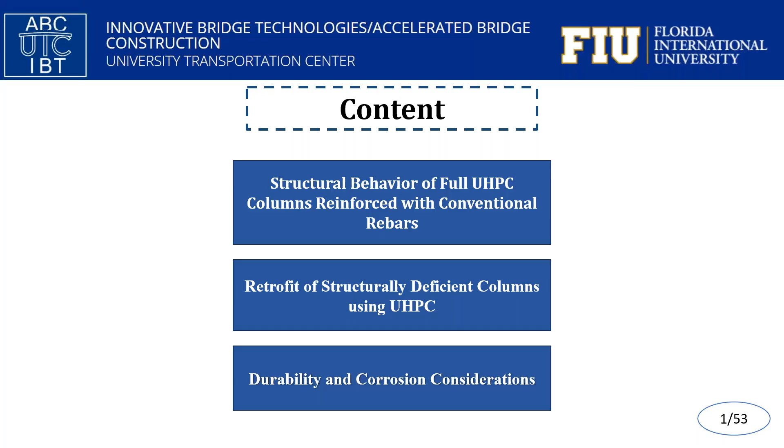The second project investigates the use of UHPC as a retrofit material for deficient concrete columns, and the third project explored the durability performance of UHPC.

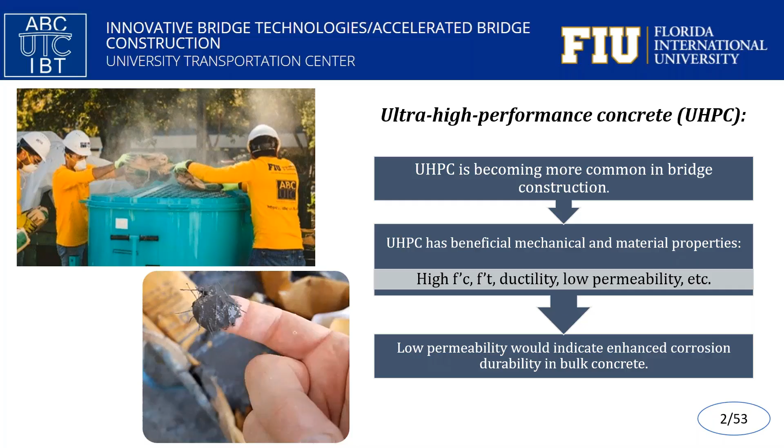Ultra-high performance concrete is an innovative cement-based composite material with exceptional properties including ultra-high compressive strength, high durability, and capability for micro crack self-healing, which can significantly prolong service life. Not just in the case of extreme loading - with time, due to environmental factors, materials deteriorate, and so do structures.

Both seismic and non-seismic structures subjected to deterioration were found to have less collapse resistance. This can be associated with material deterioration, which results in decreasing ductility and strength. Columns are the main elements for the stability of structures, and several approaches have been proposed in literature to improve the performance of columns under axial and lateral load.

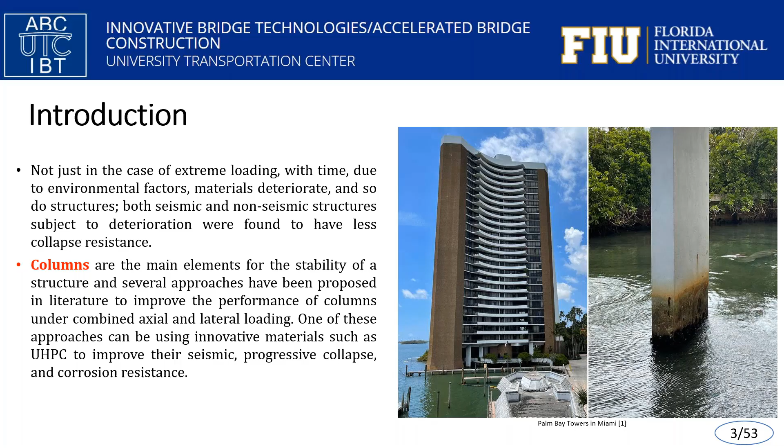One of these approaches can be using innovative materials such as UHPC to improve their seismic, progressive collapse, and corrosion resistance. Overall, very limited research work was performed to investigate the performance of full UHPC columns under axial and lateral loading. So FIU research work aims to investigate the structural behavior of UHPC columns reinforced with conventional rebars.

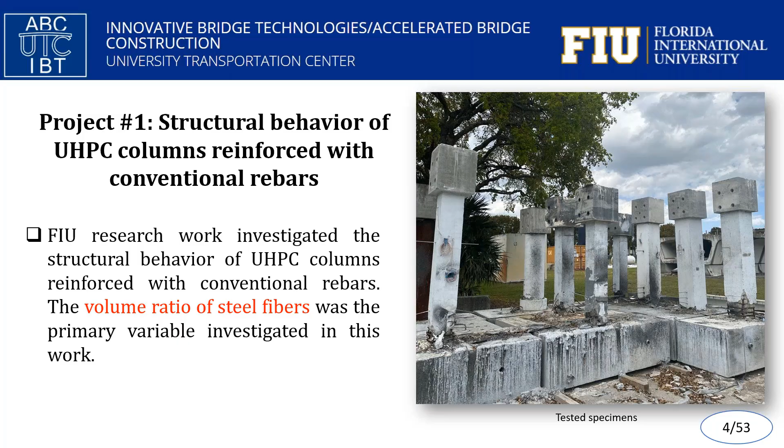The volume ratio of steel fiber is the primary variable investigated in this research work. All column specimens have 60 inches high and reinforced with conventional rebars. For longitudinal reinforcement, we used 8 rebars, and you can see the cross-section of all UHPC columns in this figure. All specimens had same geometry and reinforcement details.

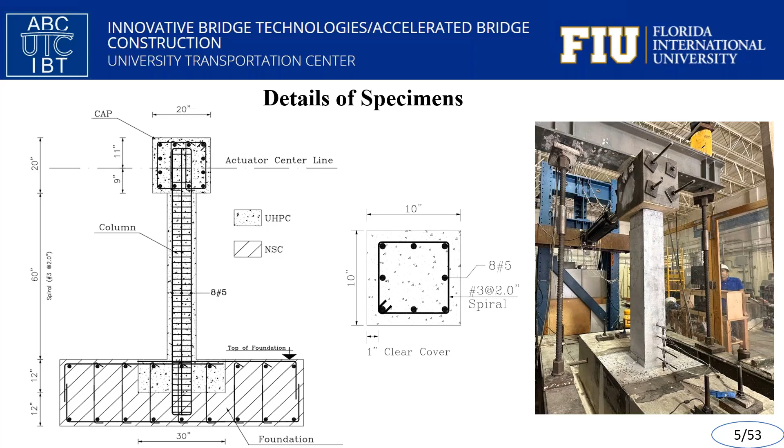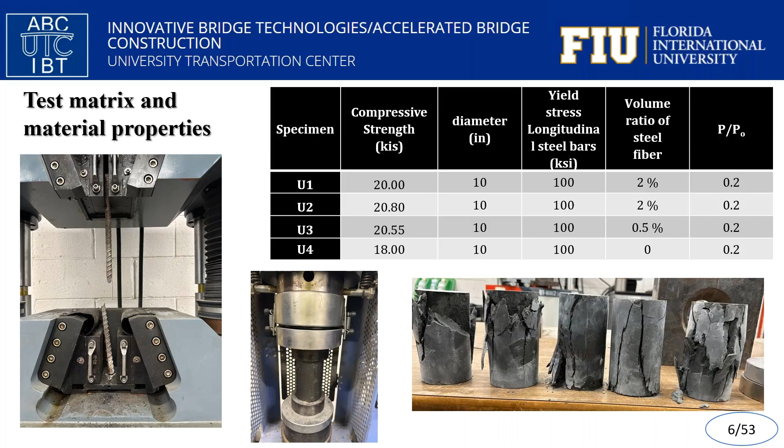To have the material properties, we tested UHPC sample and rebars in our material lab. And these figures show construction process.

First, the reinforcement cage of the foundation were placed inside the footing formwork, and all longitudinal rebars of the column were positioned inside the footing. The outer part of the foundation was then cast with normal strength concrete. It should be noted that UHPC footings were considered for all specimens to better understand the behavior of the plastic hinge.

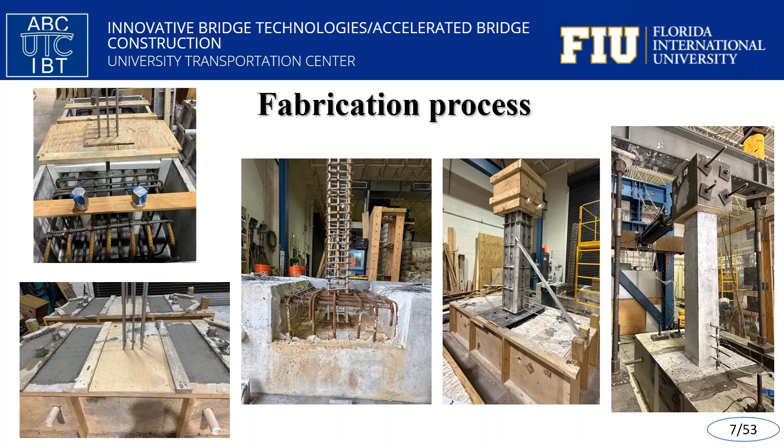Only the representative part of the foundation below the column was cast with UHPC, and normal strength concrete was used for the rest of it. Here you can see the test setup which we used to apply axial and cyclic lateral loading. A hydraulic actuator applied the cyclic load.

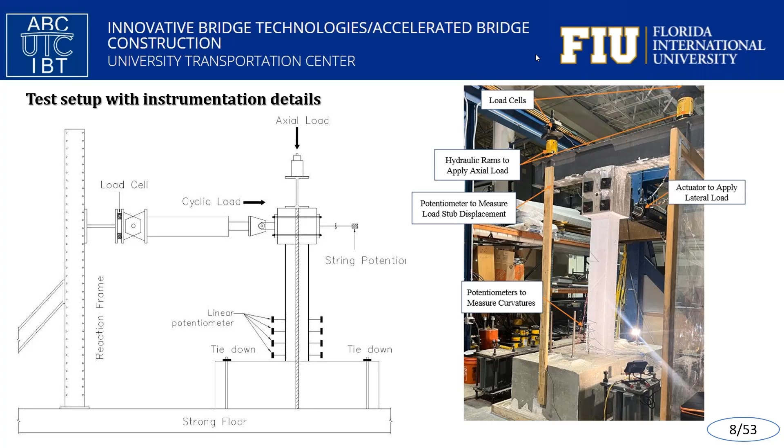The displacement control method, implemented as incremental drift ratio, governs the cyclic loading. Using a beam and hydraulic jack, a pure axial force equal to 20% of the column's capacity was applied to the top of the column.

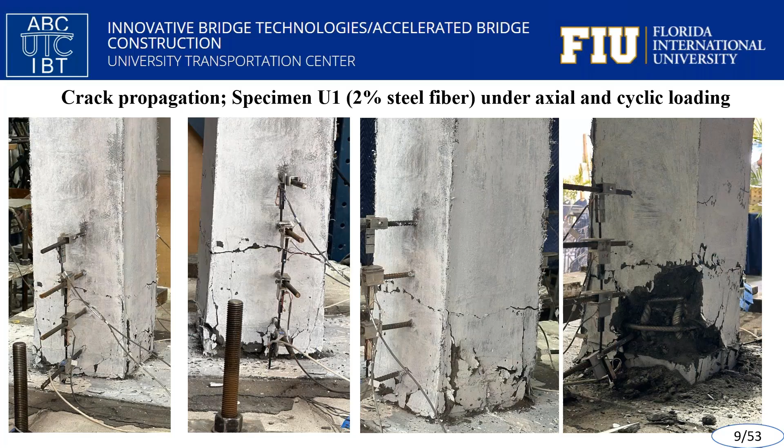Here you can see the crack propagation of our first specimen, which had 2% steel fiber. Flexural cracks appear near the base of the column at early loading stage. Cracks were concentrated at the bottom, aligning with the area of maximum bending moment and shear. As the load increased, flexural and shear cracks extended upward. This figure shows the final stage of loading, which means the column experienced about 7-inch lateral displacement.

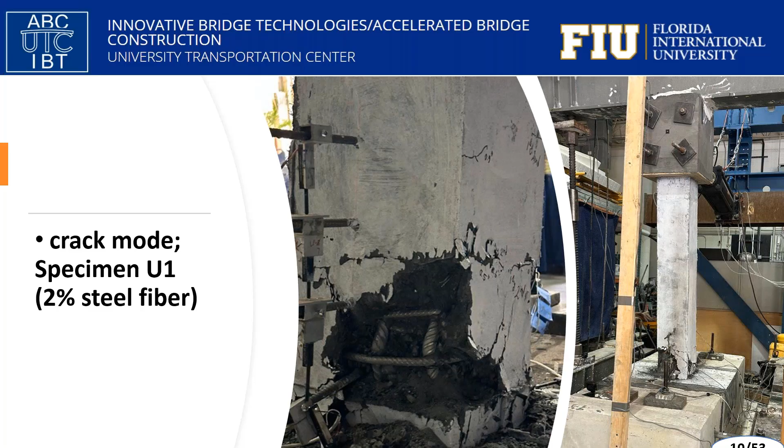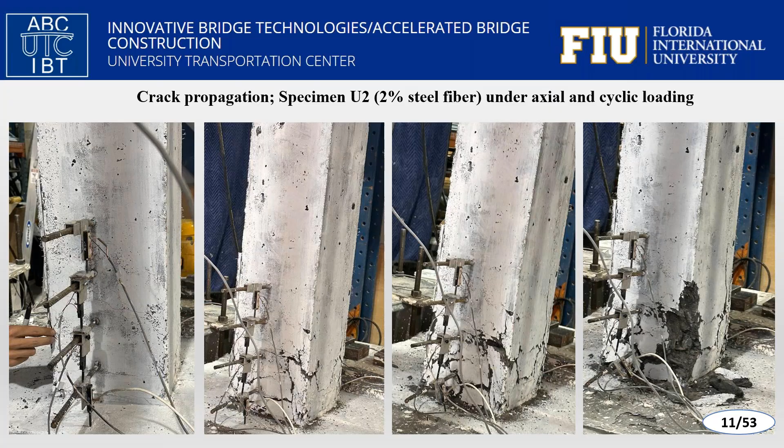We tested another specimen with 2% steel fiber, and the same damage mode was observed. Horizontal and diagonal cracks form under combined bending and shear forces, intersecting with the flexural cracks. The steel fiber delays crack propagation and prevents rapid deterioration.

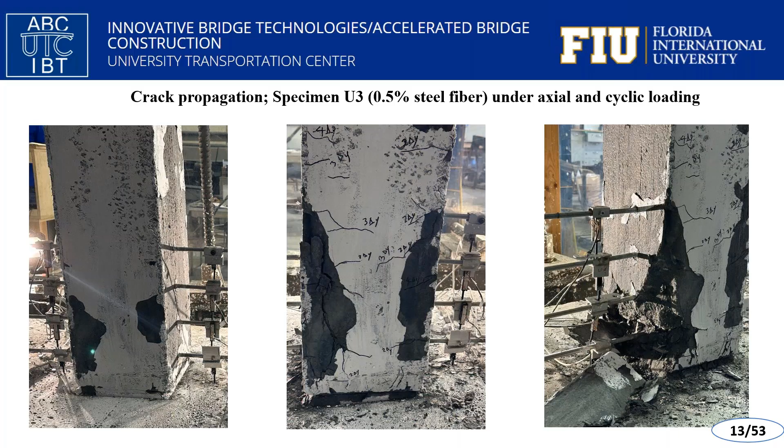Here you can see the crack propagation of the third specimen, which had 0.5% steel fiber. Horizontal and diagonal cracks were more prominent compared to the specimen with 2% steel fiber. Wider cracks and less effective control of crack propagation was observed. Spalling of concrete became evident, especially near the compressive zone. You can see the final deformed shape of the column at 7-inch lateral displacement; localized crushing and widening of cracks occurred.

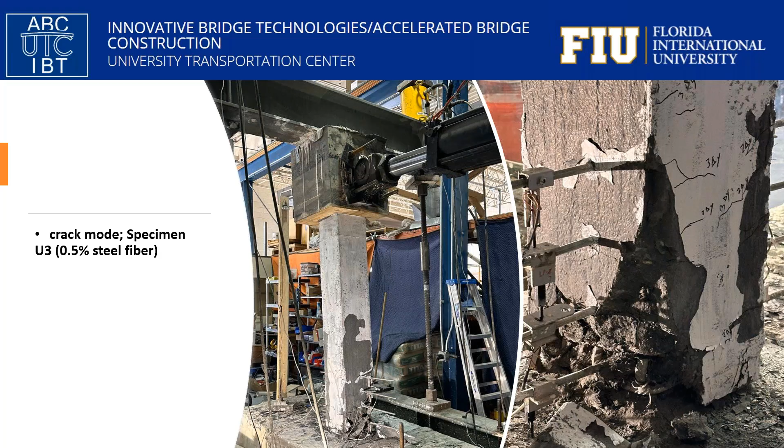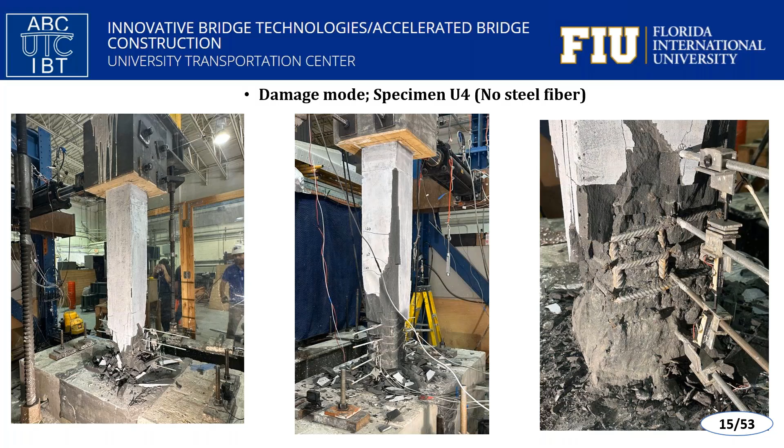Here you can see the crack modes for a specimen without steel fiber. Cracks propagated rapidly, with horizontal and diagonal cracks forming early and widening significantly. Severe spalling and extensive crushing of concrete occurred, leading to rapid loss of load-bearing capacity. We had to stop the test at 5-inch lateral displacement. Cover crushing occurred at an early stage of loading. The absence of steel fiber results in poor energy dissipation and brittle behavior.

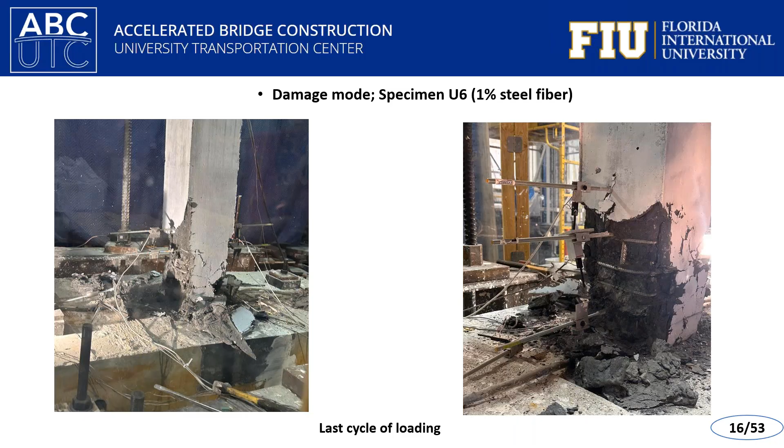The hysteretic response of specimens demonstrates the impact of steel fiber content on ductility, energy dissipation, and overall structural performance. The specimen with 2% steel fiber exhibits stable hysteretic loops. The steel fiber contributed significantly to crack control, delaying stiffness degradation and enhancing load carrying capacity.

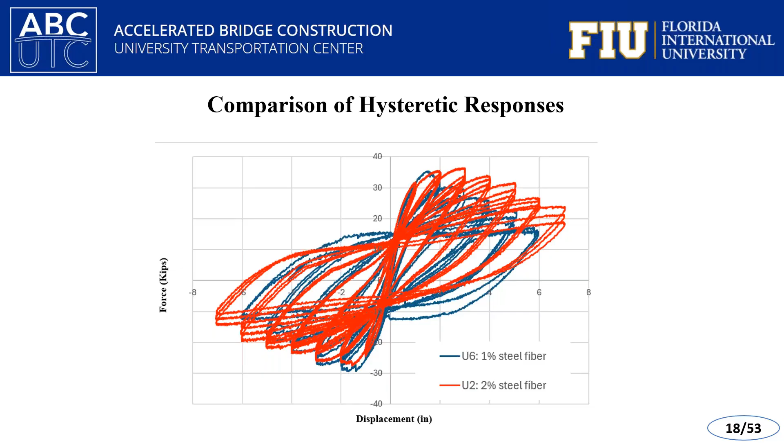The specimen without steel fiber showed poor energy dissipation capacity and rapid stiffness degradation. The absence of steel fiber results in brittle behavior with significant strength degradation. This figure shows the hysteretic response of UHPC columns with 1% and 2% steel fiber content. The 1% fiber specimen still shows improved performance compared to the fiberless UHPC column.

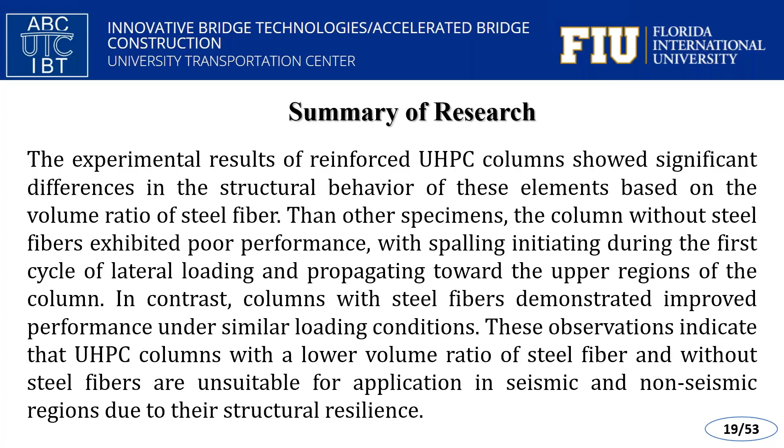The experimental results of reinforced UHPC columns showed significant differences in structural behavior based on the volume ratio of steel fiber compared to other specimens. The column without steel fiber exhibited poor performance, with spalling initiation during the first cycle of lateral loading and propagating toward the upper region of the column. In contrast, columns with steel fiber demonstrated improved performance under similar loading conditions. These observations indicate that UHPC columns with a lower volume ratio of steel fiber, or without steel fiber, are unsuitable for application in seismic and non-seismic regions due to their lack of structural resilience.

UHPC is characterized by its exceptional mechanical properties, including high compressive strength and low permeability. However, its brittleness remains a significant concern, especially under cyclic and axial loading. Steel fibers are commonly incorporated into UHPC to mitigate this brittleness and enhance structural performance.

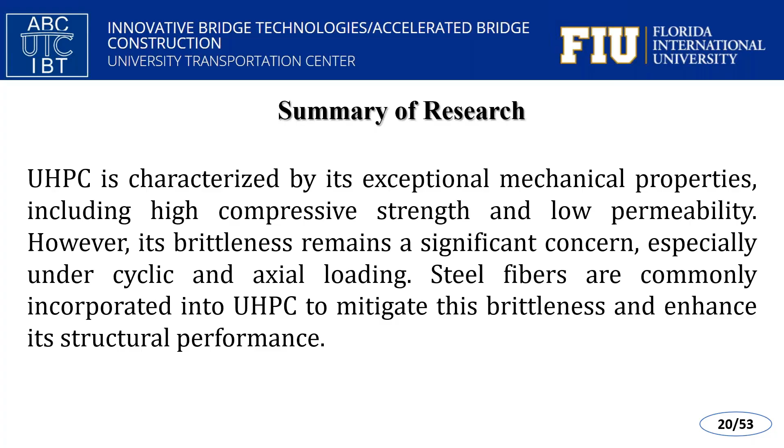Now, let's move on to a very common and critical scenario where the structure already exists, but due to long-term environmental exposure, such as corrosion or extreme loading events, certain critical elements like columns need strengthening. This is not a rare situation; in fact, it's something engineers often face in real-world practice. That's why regular inspection of existing structures is essential, based on the condition and level of deterioration. Choosing an appropriate and optimized retrofit method is crucial. Neglecting this need for inspection and retrofit can have serious consequences.

As we tragically saw in the collapse of Champlain Tower in Miami. In this context, our second project investigates how using UHPC jacket can offer an effective solution for retrofitting deficient columns.

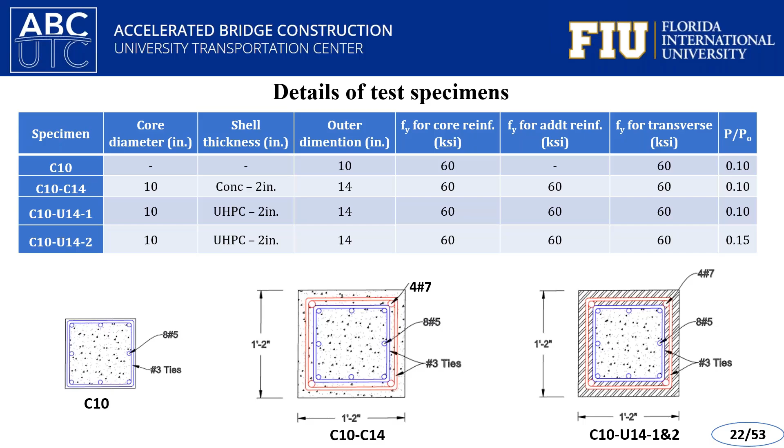The experimental program involved 4 large-scale column specimens. One served as the control column, the other 3 were retrofitted columns: one using normal strength jacket (C10-C14), and 2 using UHPC jacket (C10-U14-1 and 2). For all retrofitted columns, the jacket was 2 inches thick. One of the UHPC jacket columns was tested under higher axial load to assess the influence of axial force on performance.

The fabrication process was completed in several steps. First, the reinforcement cage for the footing was placed inside the footing formwork, and then all the longitudinal rebars of the column, including those for the core and jacket, were positioned inside the footing. The footing was then cast with normal strength concrete.

Next, the stirrups of the core were placed and the cores were cast. For the retrofit specimens, the surface of the core was roughened by sandblasting to improve bonding with the jacket. The jackets were then cast, one with normal strength concrete and 2 with open source UHPC mix.

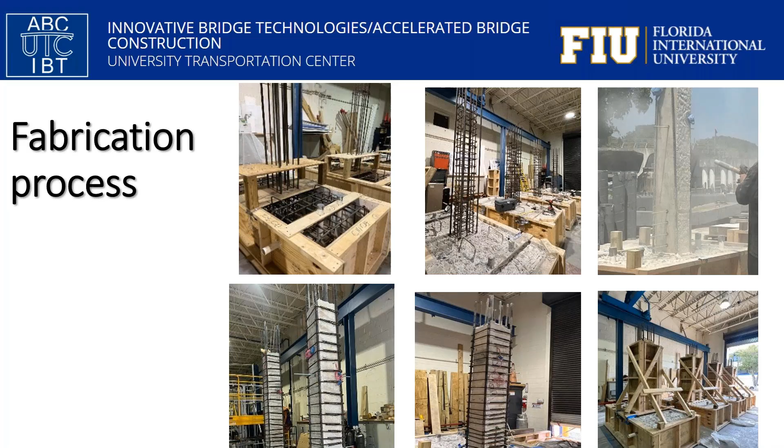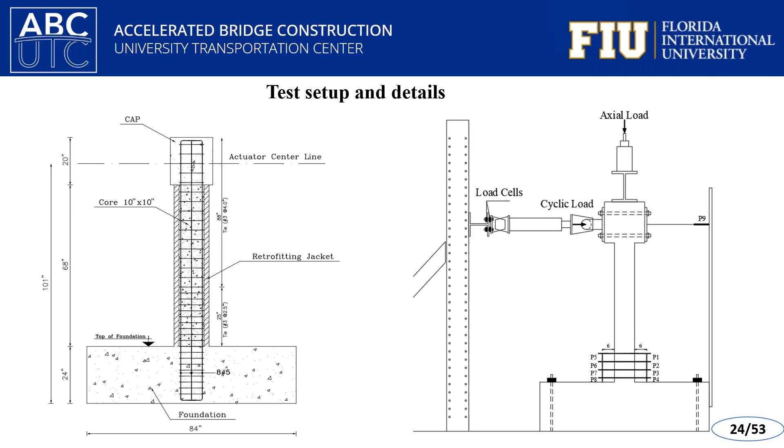This figure shows the test setup for the experimental program, which is the same as the previous project. Each column was first subjected to a constant axial load, then cyclic lateral displacement was applied using an actuator. Linear potentiometers were used to measure lateral displacement and curvatures along the plastic hinge region, and strain gauges were attached to reinforcement rebars to capture local behavior.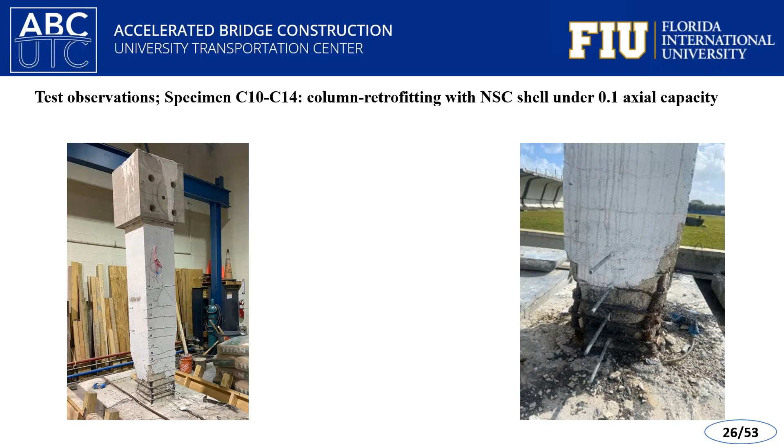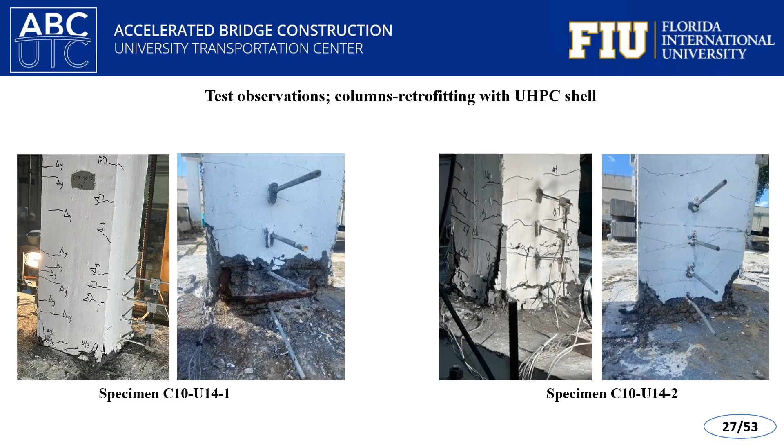This figure shows the failure mode of both retrofitted specimens using UHPC jacket. As can be seen, flexural cracks in both specimens developed within the height, but compared to the previous specimen, plasticity occurred over a shorter length. This demonstrates actually a higher stress concentration in specimen C10-U14-1, similar to the specimen with normal strength jacket. Failure occurred when the crushing of the concrete penetrated through the jacket, causing the longitudinal rebar to lose the UHPC's lateral strength and subsequently buckle.

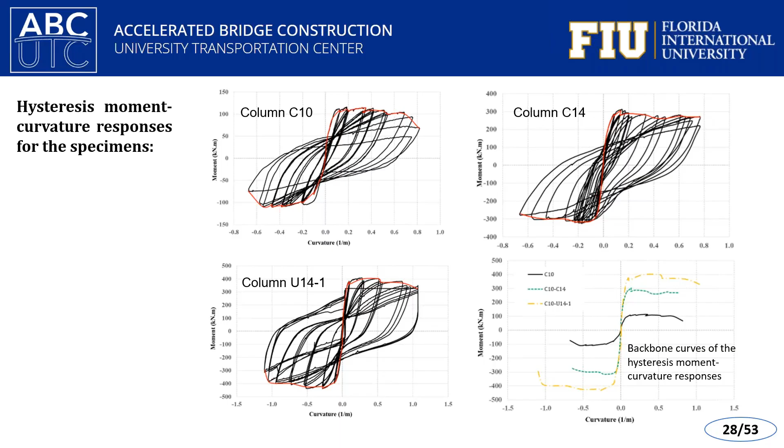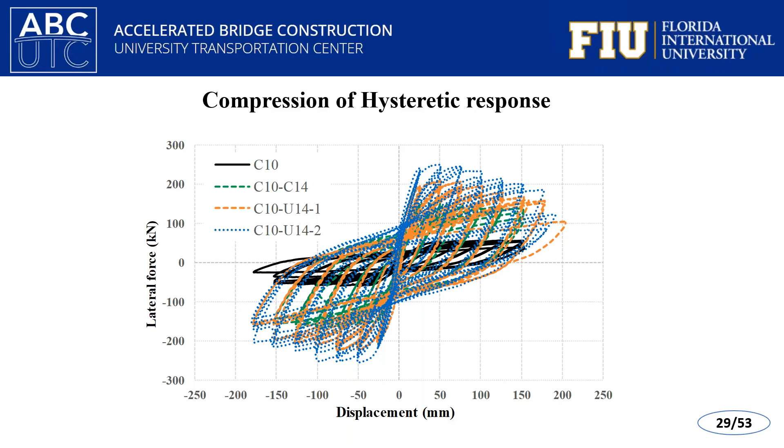The hysteresis curve for all specimens shows ductile flexural responses. In conclusion, the experimental data indicate that a reinforced UHPC shell served as an effective retrofit technique.

The reinforced UHPC shell notably enhanced the structural performance of the retrofit specimen by increasing flexural capacity, stiffness, and energy absorption during cyclic loading, while preserving ductility compared to normal strength concrete jacket.

The reinforced normal strength concrete jacket didn't significantly decrease the plastic hinge length. Conversely, the reinforced UHPC jacket significantly reduced the plastic hinge length, focusing plasticity within a shorter region. Despite this reduction in plastic hinge length, the plastic rotation capacity increased, enabling the UHPC jacketed members to maintain ductility effectively.

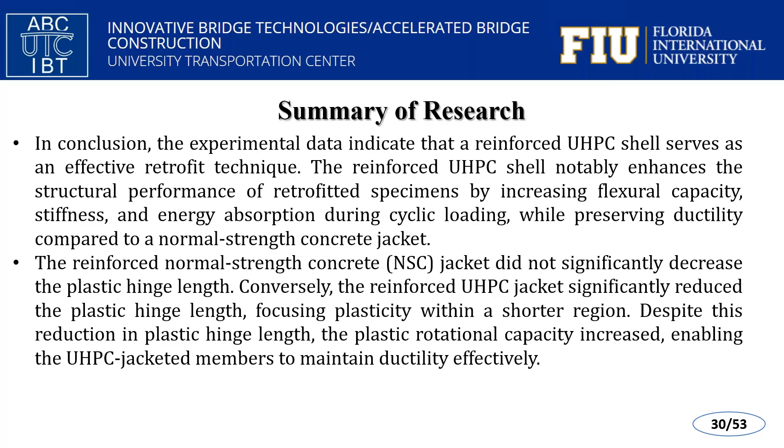Thank you, Fatima. So you gave us a couple of case studies of interesting and novel uses for UHPC for bridge applications. It seems like UHPC is becoming more and more important as a tool and a material for our construction. So we'll talk a little more about some of the durability implications for UHPC and some corrosion considerations, and how they may be implemented not only for new construction but also for some of the retrofit cases that you described in the second case.

Ideally, steel placed in concrete environments should be a very ideal situation. Steel in the high pH environment of the concrete pore water typically develops a passive film, so corrosion really should not occur at all. But it's in extreme and aggressive environments where that passive film can be broken down. In most of the cases we see, especially from marine bridges and marine columns, it has to do with the presence of salts.

Notably, chloride ions are notorious for being able to break down that passive film. When you have these aggressive salt environments, whether it be from the seawater itself or just atmospheric spray near the coastlines, chlorides are able to penetrate through the concrete cover, through the concrete pore water, eventually diffusing with enough concentration at the steel interface to start breaking down that passive film.

This cartoon on the right-hand side is drawn by Marcel Pourbaix. It's a famous cartoon showing some of the thermodynamics associated with how corrosion can develop for steel in various environments, including high pH concrete pore water environments. Typically in high pH environments, the corrosion, or the devil, is locked up in a cage, and we call that passivation. So we can manage the rate of corrosion that can occur and limit that rate to where it can extend to the service life that we expect for our bridges.

In certain environments the devil can break free, where corrosion can occur, and the effect of aggressive environments like chlorides really is able to break that devil free from that cage essentially. We'll talk about some of the material ramifications for chloride penetration, but we'll also spend some time focusing on an area in terms of carbonation-induced corrosion. This has implications for marine bridges, for bridges that have long service lives, and it has implications as well for buildings, especially for older structures or concrete with lower quality concrete. We'll talk about how UHPC can be used to mitigate some of these effects.

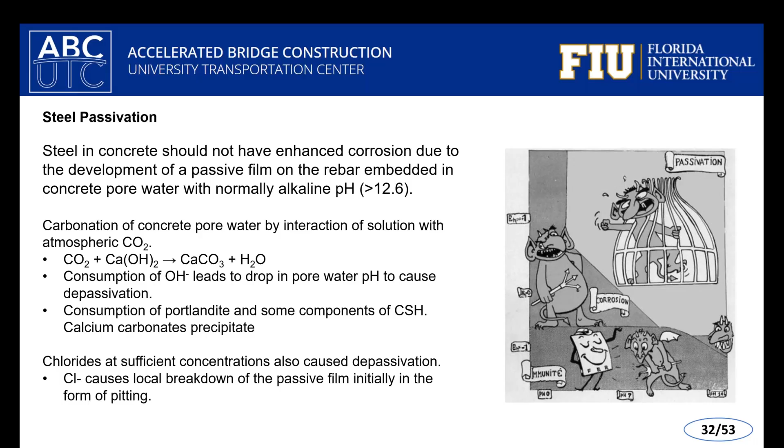Importantly, the consumption of the hydroxyl ions causes the reduction of pH. Going back to Marcel Pourbaix's cartoon on the right-hand side, it gets to a point where the devil becomes more prominent as we shift from the higher pHs to lower pHs as the hydroxyl ions are consumed. We'll talk about some of the effects, and how UHPC can be useful to mitigate some of these effects.

So what are the major factors that account for carbonation-induced corrosion? Well, evidently it's material related, and in part also design. The cement content you have, the concrete mix design, including UHPC, and the concrete composition are related in terms of how permeable the concrete may be to not only moisture, but also gases, including carbon dioxide and oxygen.

Evidently design is important, the cover depth. The larger the cover depth, the longer path it takes for moisture to penetrate, or for gases including CO2 to penetrate through the system. So larger cover depth can buy you a little more time.

Relative humidity of the environment is also very important because it's associated with how much water and moisture can be present within the pore system of the concrete itself. At higher humidities, you can develop more moisture within the system, and corrosion is an electrochemical process that requires an electrolyte, requires water. So at higher moisture presence, you can promote these electrochemical reactions, the oxidation-reduction reactions that cause damage to the construction materials.

Wet and dry cycling in terms of moisture is also very important and is somewhat related to oxygen availability. Typically for infrastructure systems, what really causes corrosion in terms of the actual reactions that occur really is oxygen. Oxygen is the universal oxidizer. The reduction of oxygen typically is the reaction that accounts for the oxidation of the steel and the iron. So oxygen needs to be present in the system.

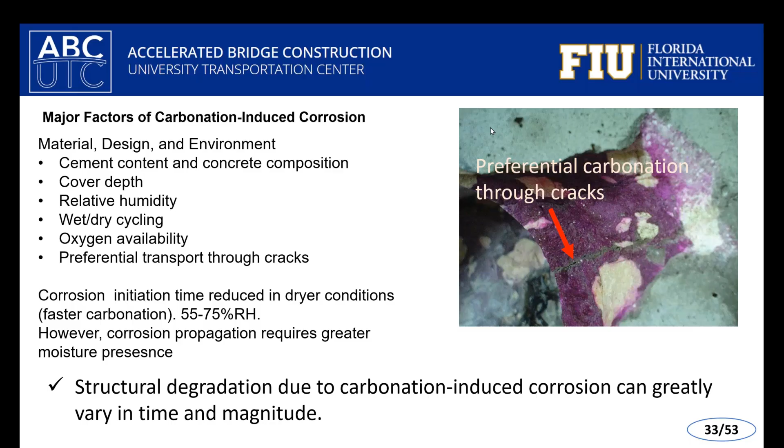Again, we'll allude a little bit to UHPC and how that may be beneficial to mitigate some of these effects. One important thing to mention for this type of corrosion is that the degradation can vary greatly. It's dependent on the material you use, the design detail provisions of the rebar placement, the environment, the cycling of environmental conditions. Many different things affect these things, so often it's very difficult to get a firm grasp on service life.

Piggybacking off some of the work that Fatima mentioned, especially the second project looking at the retrofit system at FIU, we did some experiments with those very specimens to identify the effect of carbonation, how it can occur, and also with the retrofit. We have long-term exposure, the very test columns that are out in our boneyard, where we allow the corrosion to continue, and continuing work looking at the possibly beneficial effect of having that UHPC retrofit in terms of existing corrosion that may occur.

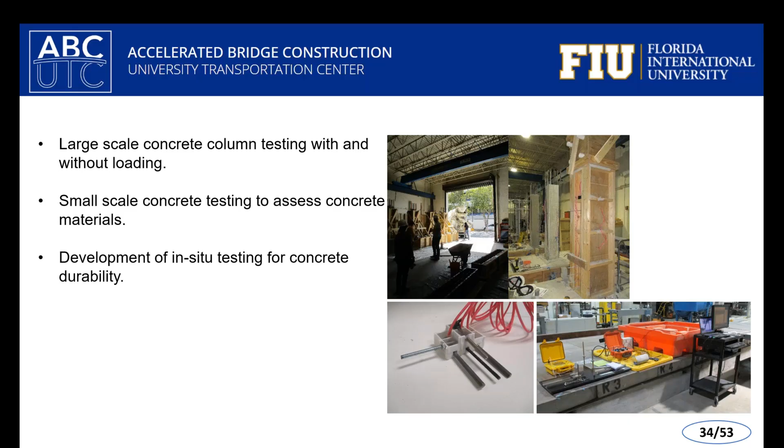So here are a couple pictures of those samples, and I know Fatima presented a little bit on those already. Those are the columns that were cast with the initial normal strength concrete in the interior, a fairly benign concrete. The idea is that this type of concrete probably has more damage than a higher performance concrete, and it may need retrofit. The bottom left-hand corner shows some of the sensors that we fabricated and designed here at FIU and implemented on these test specimens to identify corrosion development, along with some of the material testing that went along with this research program.

So some more pictures of the test specimens during testing. The substrate concrete was a class 2 concrete with a compressive strength about 3.4 KSI. We placed those corrosion probes, two per column - one as a control where it wasn't carbonated, and the other where we developed a method at the university to accelerate that corrosion so we don't have to wait 50 years essentially to get some results.

And so we subjected those columns to accelerated carbonation. We had greater than 99.9% pure CO2. We pressurized a vessel to around 50 psi for one set, and 20 psi, a little bit slower, for another one, to try to force that corrosion and measure its development.

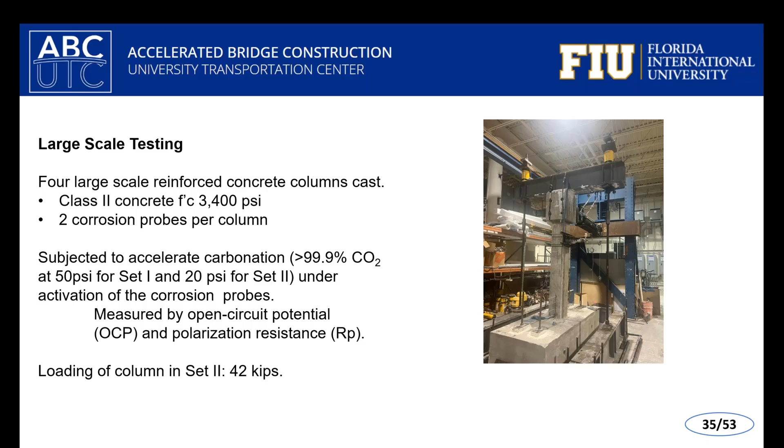The bread and butter for us really is the open circuit potential, the half cell potential some people call it, and also looking at the polarization resistance relating to the corrosion rate.

And knowing the surface area of the steel probes that we have, we can calculate the corrosion current density for each one of our samples. And notably, they're very, very small.

As we indicated, steel loves to be in concrete. It's a very beneficial environment where it should remain durable until bad things happen, including having a long-term presence of carbon dioxide in the system. So the big thing here is we're checking our sanity, identifying the initial cases to confirm they weren't corroding, and then we pressurize the vessel.

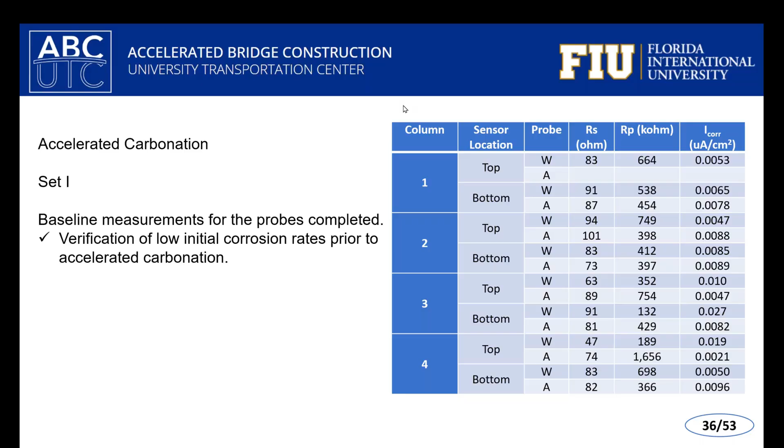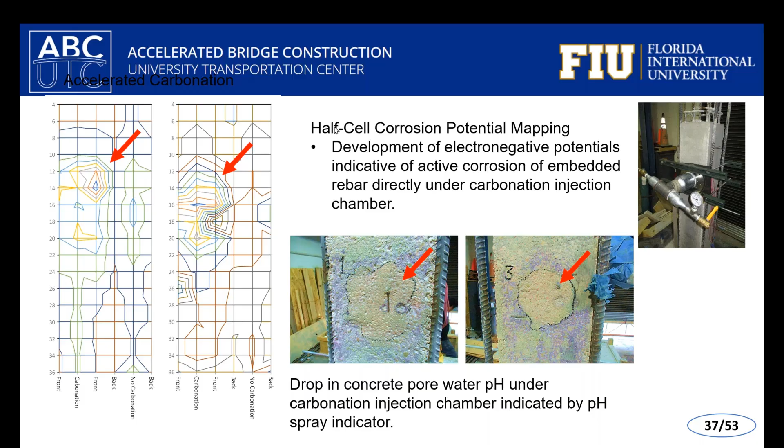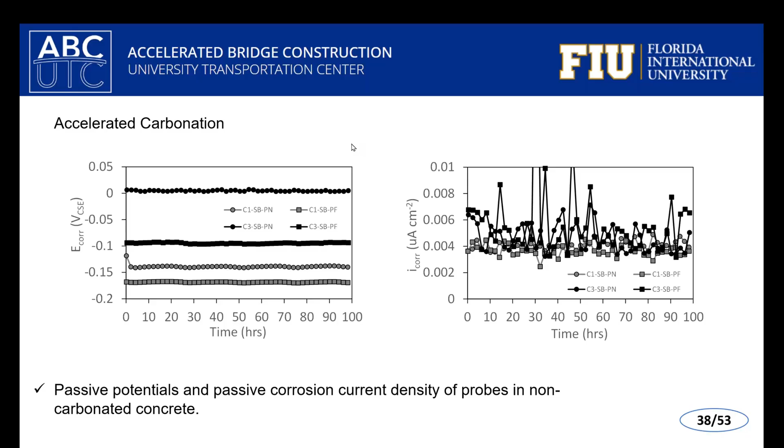It got to a point where it became sufficient to activate the steel directly underneath that pressure vessel. We know active corrosion developed because we have that drop in half cell potentials from more positive to highly negative, more negative than about minus 300 millivolts versus the copper sulfate electrode, along with a rapid increase in corrosion current density. So this is how we verified that corrosion indeed developed underneath that system.

I'll remind the audience that the interior concrete was a low quality concrete. The compressive strength was about 3,400 psi or so. And it seems like some of the residual oxygen that was displaced by the CO2 gas outside was able to move back in or diffuse back into the local area. So for retrofit, this is something we're keeping track of and considering for design purposes, the residual amount of oxygen present in the system, especially when you have a shell type retrofit, and how it may come into play in terms of the long-term durability of the rebar underneath. So that was an interesting finding that we're continuing to explore further.

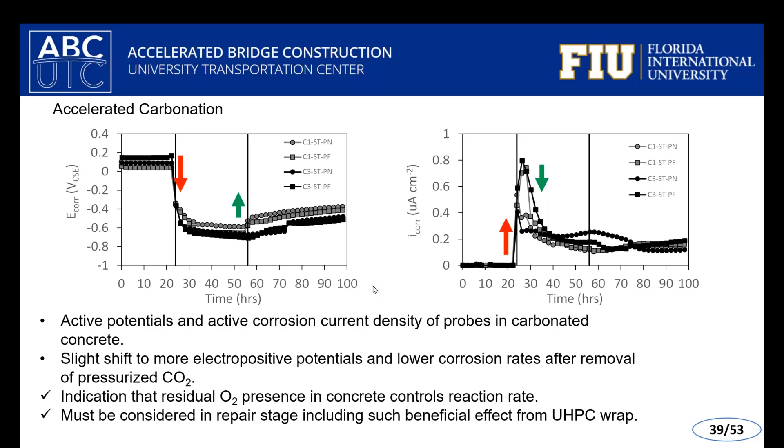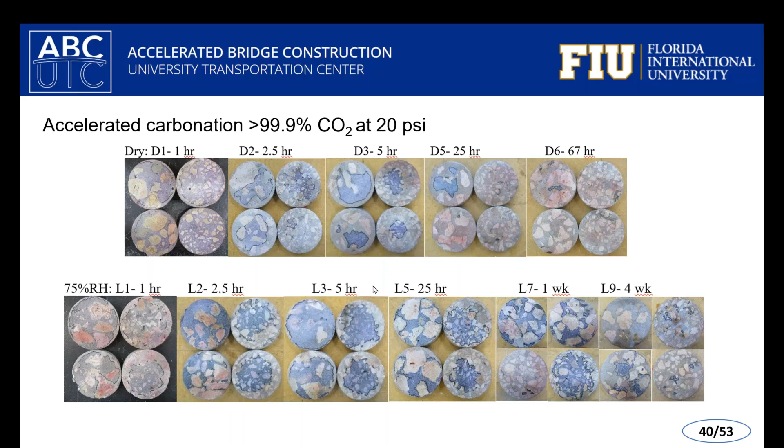With a 75% humidity, it took us about a month. We also placed samples at 85% humidity and soaked in high humidity. In the time period that we were working with these, they did not carbonate, because the carbonation front moves very, very slowly through wet concrete, through the water in the concrete pore water.

So how can UHPC be beneficial to us for these type of problems? Here's results conducted at FIU a handful of years ago, but very pertinent, just exploring some of the generic characteristics of UHPC, one being the electrical resistivity of concrete. Even for conventional concrete, we use this as a means to identify quality of the concrete and conditions where corrosion may occur. Resistivity is related to permeability, and it also relates to possible coupling of the anodes and cathodes that is required for corrosion to occur.

In the peach and maroon colors, that's for conventional concrete. You notice the resistivity is much lower than those of the blue and purple UHPC materials. So evidently we know UHPC is a very high quality material with high resistivity. High resistivity relates to low permeability, and also less coupling of those electrodes required for the corrosion process. Also notably, we see the conventional concrete is also dependent on moisture. When you have dry environments, you will have much higher resistivity, but still fairly low. When it's wetter, the resistivity will be smaller.

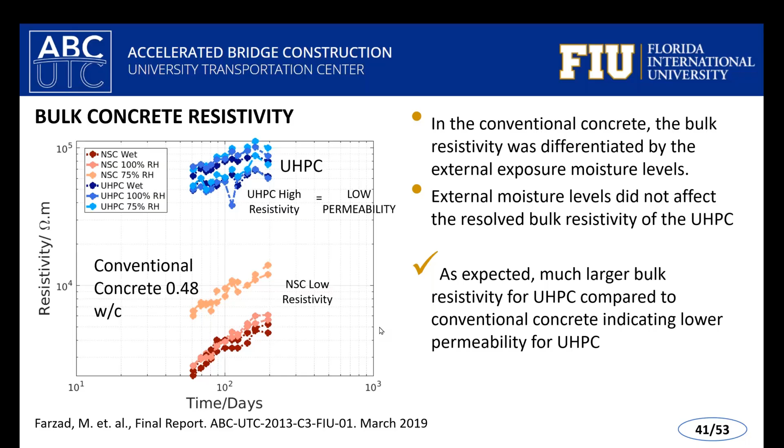But in the case of UHPC, whether we kept it in ambient condition at 75% humidity or we soaked it, there wasn't really an effect, because UHPC is such a dense material. The moisture never really had the opportunity to enter into the concrete pore network. So even with very wet environments, it still retained very high resistance and resistivity. Beneficial again because it prolongs the time it takes for any aggressive ions to move. It causes less effective coupling of the system, and is also probably related to possible gas movement in the system as well. I'll mention some of my colleagues at FIU who helped with some of this work.

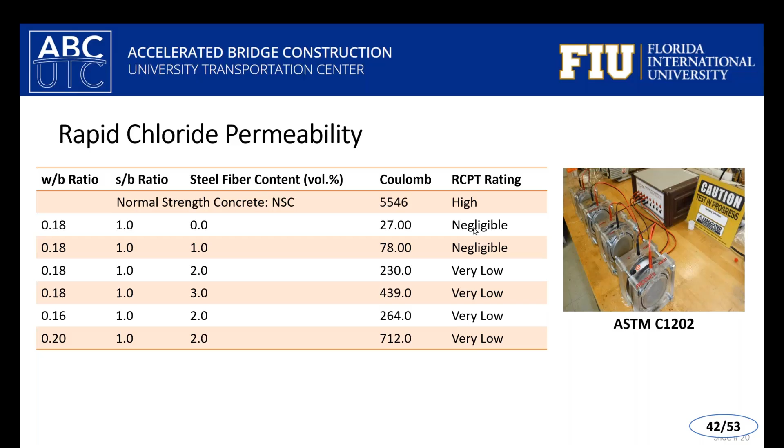Here's some results for the rapid chloride permeability test with migration test, looking at some of the UHPC mixes being developed and used here at FIU. Typically, the first row is for normal strength concrete, where a very high amount of Coulomb charge passes through the system, so the rating is high. Evidently, ions can pass through this electric field very quickly. Compared to that, for our UHPC material, the amount of Coulomb charge passed is much smaller, in some cases considered negligible or very low, verifying again that UHPC is a very dense material and allows for slow penetration of aggressive ionic species that can cause corrosion to occur.

Some other testing we did looked more specifically at gases, in particular oxygen. We looked at oxygen diffusivity using an electrochemical technique. I don't want to belabor the technique itself, but through current that develops in the corrosion process, we were able to identify the extent to which oxygen can develop.

We identified this oxygen diffusivity comparing our conventional concrete in the bottom left graph. The three on the left represent normal strength concrete at different moisture conditions, and the three on the right are for UHPC at different moisture conditions.

Invariably, the UHPC, whether in a dry or wet environment, has much lower transport of oxygen through the concrete compared to conventional concrete. This is good verification that the concrete has low permeability, and that gases have a more difficult time penetrating this material, whether oxygen or similarly CO2.

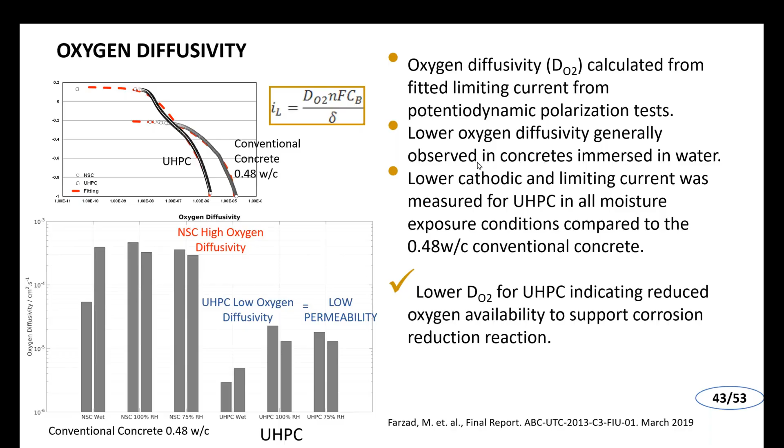So UHPC can be a useful material to prolong the time for which CO2 can penetrate through the system. Looking more in terms of retrofit and using UHPC in a mixed environment, mixed with normal strength concrete, for repair applications essentially.

Some testing was done at FIU to look at the extent to which what we call macrocell coupling can develop. What does that mean? There are many cases in piles and columns for bridge work where damage occurs even after a retrofit. Part of this has to do with what we call a halo effect, and also macrocell corrosion. You have steel embedded in the new material, and some rebar still embedded in the substrate material, and invariably there's some amount of chlorides that remains in the system.

We look at the effect of coupling this steel embedded in different environments and see if it can be adverse, and if UHPC repair work can be any different or better, for example. Of course the caveat is the extent of the repair, but it really depends on the project. Sometimes repair may be localized, sometimes much more extensive, such as a jacket covering the whole entire column, for example, covering a greater surface.

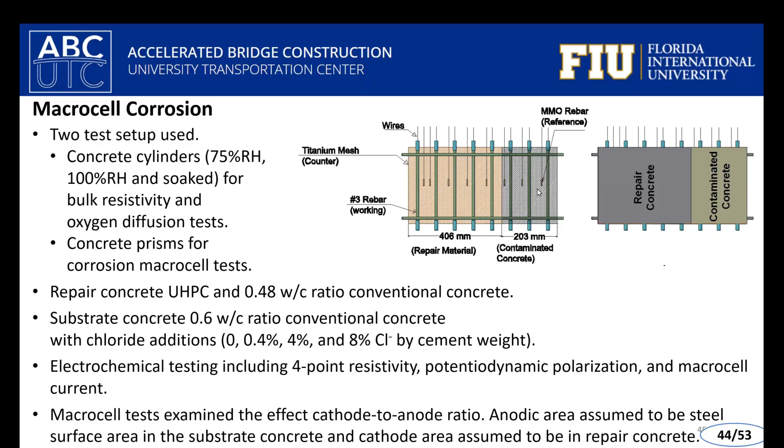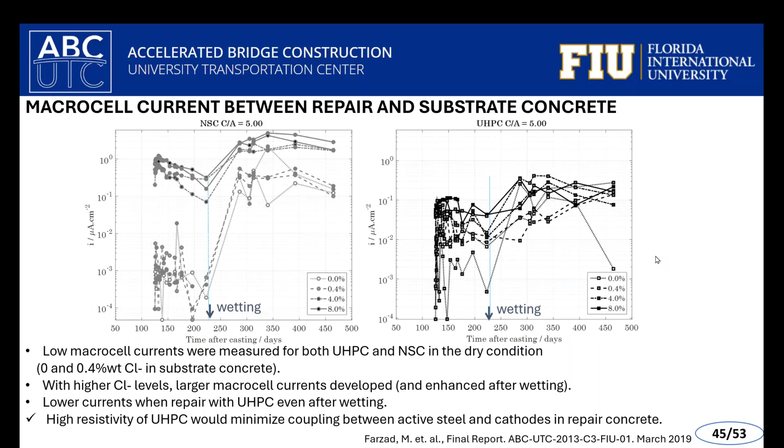Even carbonation can be partly alluded to as well. Of course, the caveat is it depends on the size of the repair, the placement of different rebar, and oxygen availability. But the results show promising beneficial effects with UHPC.

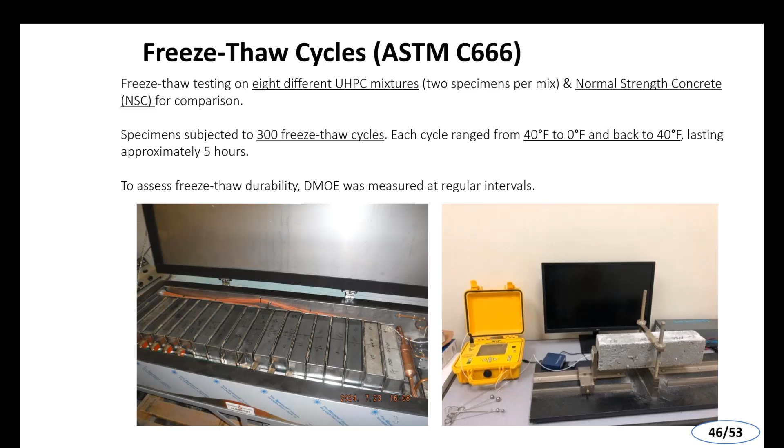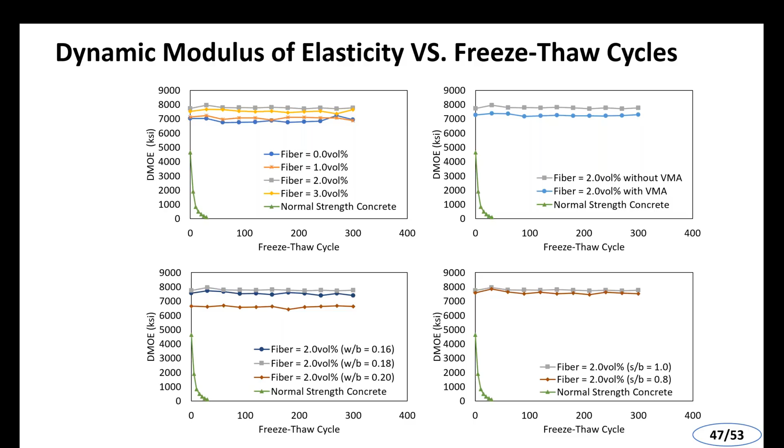With the last few minutes I have, I wanted to present some of the work Dr. Azizinamini was working on. I think it's a good case study to represent the good use of UHPC for different designs, including high rises—in this case a 42-story building using UHPC for columns, which is the theme of today's presentation.

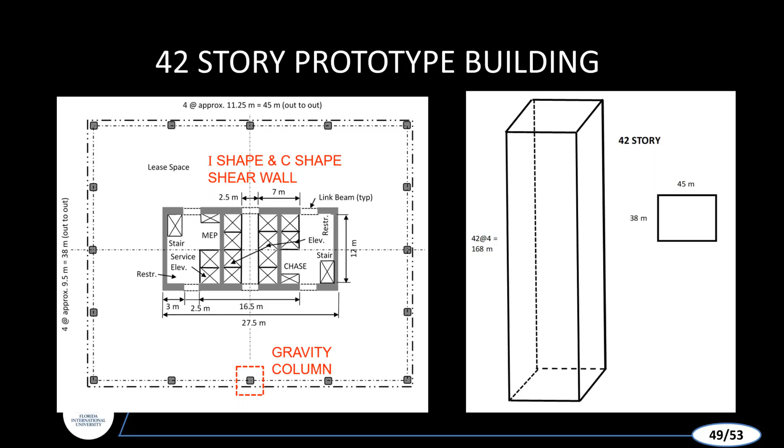In this particular case design study, it's developing a building, 42 stories, about 168 meters high. Here are some of the initial floor plans of what it may look like, and the work looked at the various columns that can be developed. I'll cover these materials real quick.

UHPC is a strong material, which means for the same type of loading and stress and strength you may encounter, you should be able to use less material—stronger, thinner, more slender elements that can carry the loads for these designs. Importantly, this example shows that taking advantage of UHPC's mechanical behavior, you may be able to adjust your form work to do things faster or even open up floor spaces. We'll talk about the columns a bit more, showing you can reduce the floor plan using UHPC.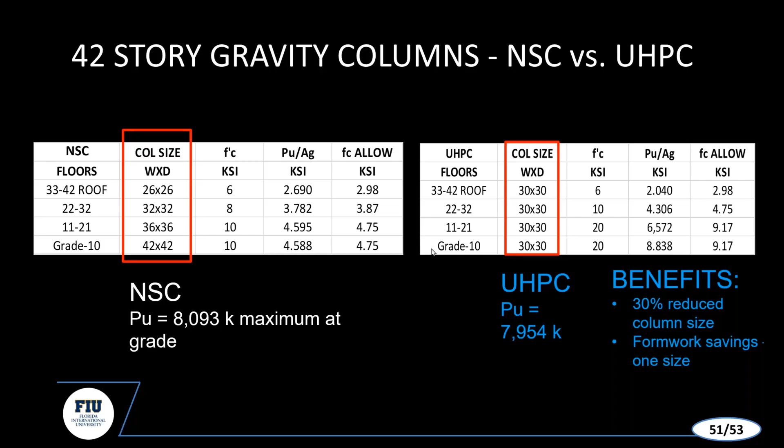With that, I would like to pass the presentation back to Fatime, who will conclude our presentation.

There are some important advantages of UHPC for columns to mention at the end of this presentation. Research on UHPC for columns indicated good structural performance with axial and lateral loading can be obtained with appropriate steel fiber content. FIU research is investigating reducing steel fiber content to improve cost effectiveness of UHPC applications in columns. For retrofit, a UHPC shell can increase stiffness, strength, and energy absorption of columns compared to normal strength concrete jacketing. UHPC also shows excellent durability, including resistance to corrosion and other environmental factors, resulting in a longer service life.

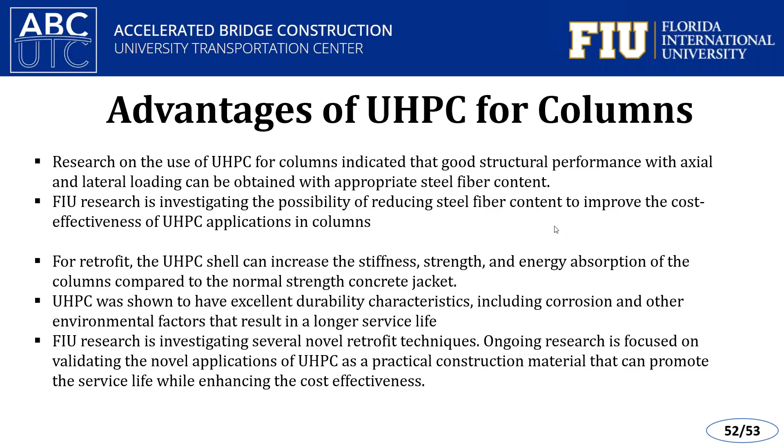FIU research is investigating several novel retrofit techniques. Ongoing research focuses on validating the practical application of UHPC as a construction material that can promote service life while enhancing cost effectiveness. Thank you for your attention.